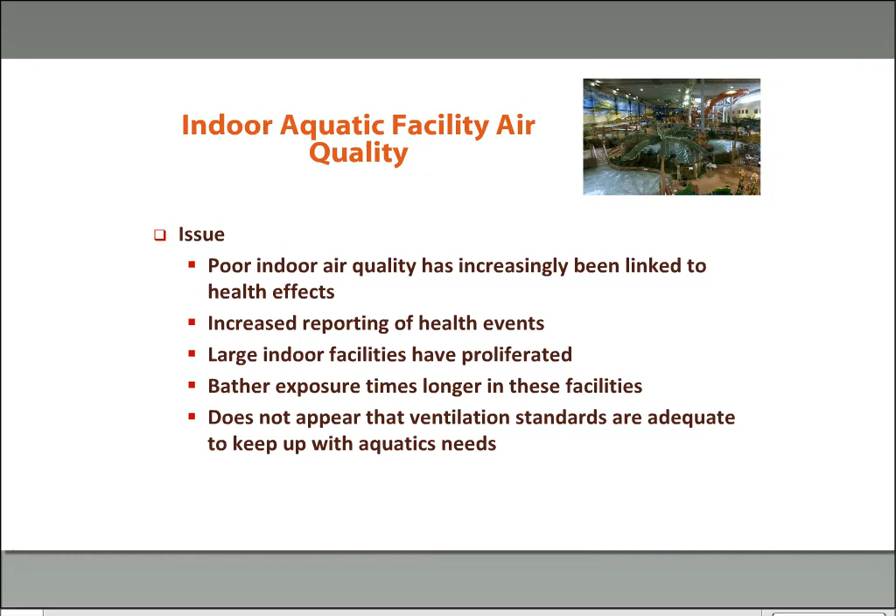The large indoor facilities have proliferated, and you're seeing more of the indoor water parks, and as such, the activity is a lot longer. The bather exposure time is longer. It's a destination. Folks will be there for hours at a time instead of going in for a quick swim and leaving. And from what we've been seeing, even as we started developing the initial criteria in the MAHC for ventilation, it does not appear that the ventilation standards are adequate to keep up with the aquatics need. So hence the ad hoc committee being established by the Council for the Model Aquatic Health Code.

And here's the roster for the committee. The chair is Ralph Kittler, and you can see that Chip Blatchley, Dr. Blatchley, is a member of the committee. We've got experts from a lot of the industry, from air handling to engineers to architects and operators, as part of this committee. And the basic charge for this committee was to identify and assess the factors that affect the air quality at indoor aquatic facilities, including the air handling, air distribution system design, effectiveness, and operation.

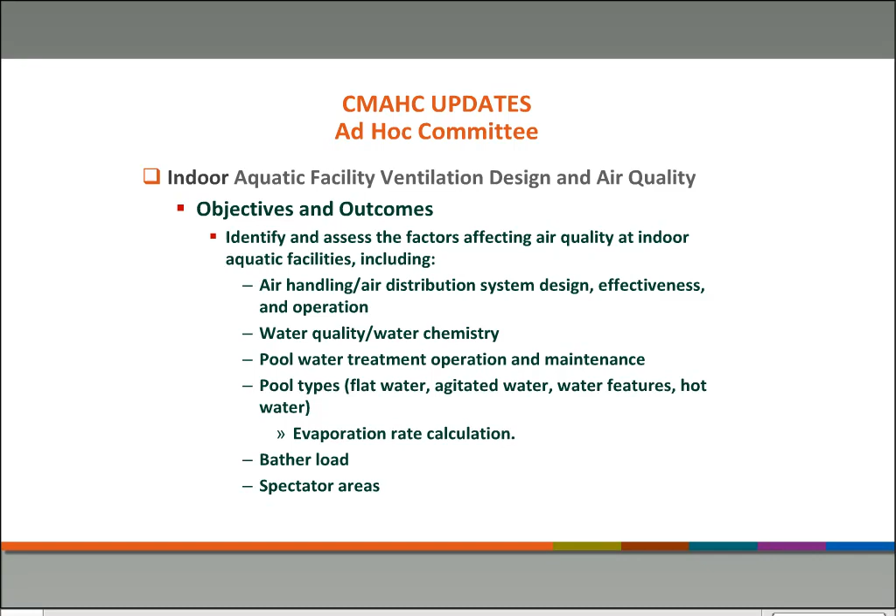It's not just the air handling that could be problematic. We know that water quality, water chemistry is kind of the root of the problem. So the committee is looking at that. Pool water treatment operation, maintenance, pool types. There's a big impact, whether it's flat water, agitated water, spray features, or hot water, and bather load and spectator areas. So the committee is looking at all those aspects to see what the impact is, and then to review and evaluate Model Aquatic Health Code requirements to determine if identified factors affecting air quality are adequately addressed. And subsequent to that, develop revisions of the MAHC design and operational standards to better address the air quality.

And as part of that work, the committee has identified a lot of different information that's going to be needed to answer some of these questions to move forward. So hence the research proposal that was requested by the ad hoc committee, which Dr. Blatchley put together and is going to speak to today, to try to answer some of these questions and bring data back so that we can move forward with appropriate design and operational updates to the MAHC.

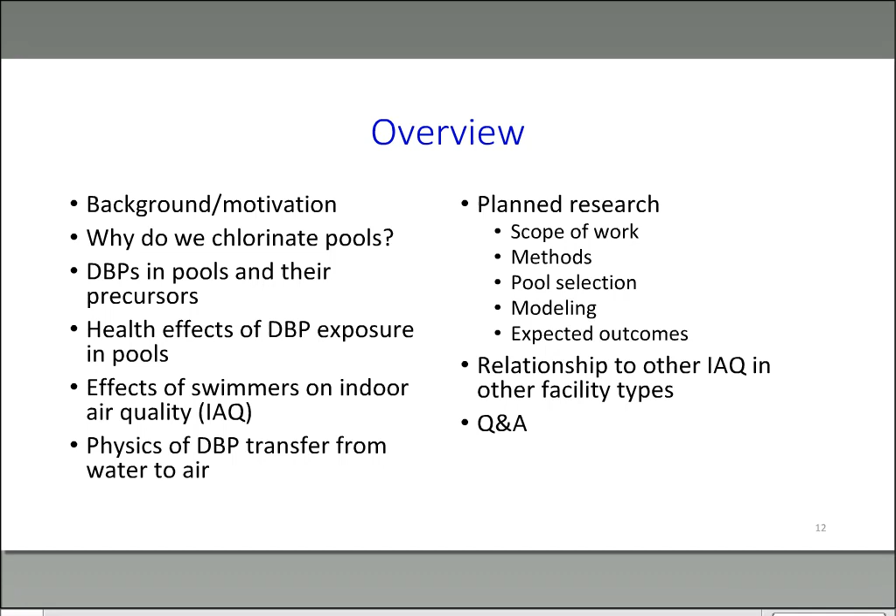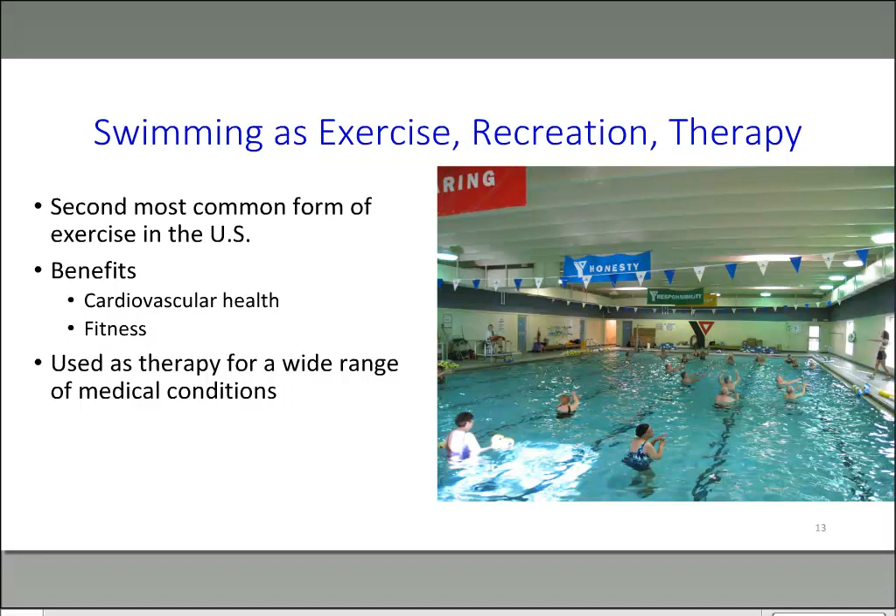Let me just dive in. So I think I'm probably preaching to the choir here. We know why it is that people choose to use pools for exercise, recreation, and therapy. Swimming is the second most common form of exercise in the United States and has a number of clear benefits in terms of improved cardiovascular health and fitness. It's also used as therapy for a wide range of medical conditions. So there's lots of different reasons why we have these facilities.

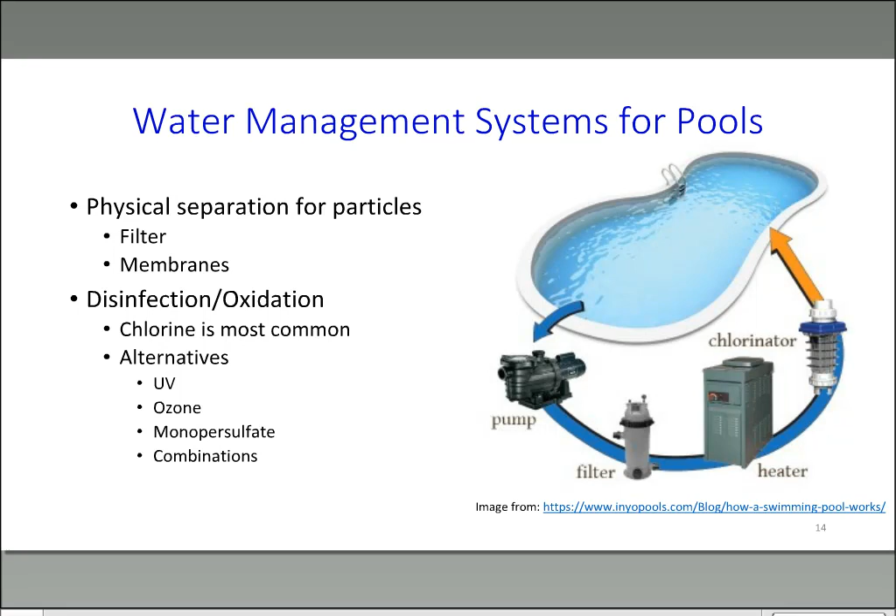Among pools, again, still preaching to the choir, there's a requirement in most applications for treatment of the water. That treatment is going to involve generally two groups of processes. The first are physical separation processes for removing particles. Those will involve a filter or membranes or both. And then the second group of processes I've just lumped together as disinfection and oxidation. Chlorine is by far the most common agent that's used to promote both disinfection and oxidation. But there certainly are alternatives that are relevant. They include, among other things, UV, ozone, and monopersulfate, and there are some combinations of these things that are added as well. So these things all will play roles in both water quality and air quality, but my focus today is going to be on the chlorine side of things.

So in terms of, why do we chlorinate pools? It's mostly to address those issues that I just described, and the reason that we've chosen chlorine for most of these applications is, number one, it's very effective as a disinfectant against bacteria and viruses. Chlorine is also a powerful oxidant, so that allows us to not only disinfect water, but also to degrade by oxidation constituents that are left behind in the water, usually by swimmers. Chlorine is also really inexpensive in a relative sense and pretty simple to use. There's a long history of its use, and so people are pretty comfortable with it.

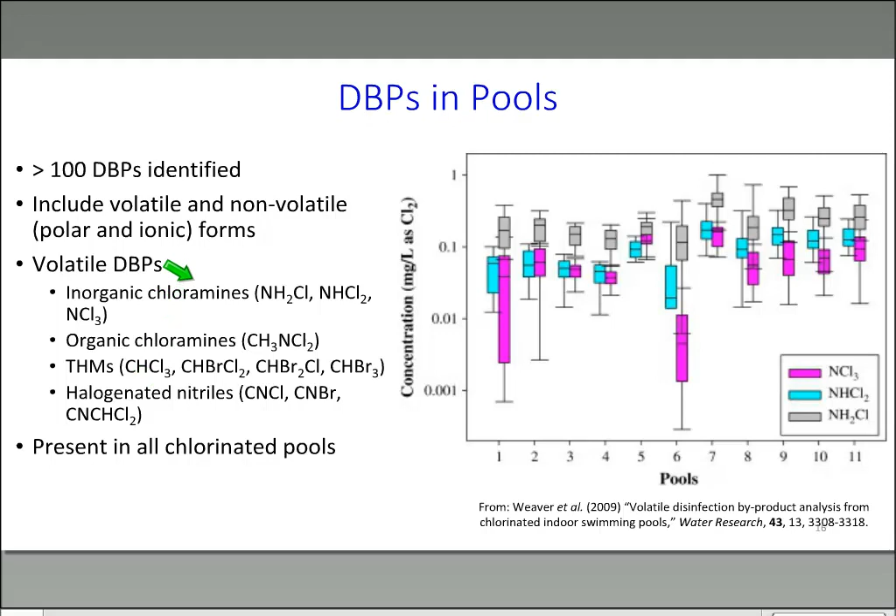And so what we observe is that within each of these pools, there's considerable variation in the concentrations of each of these things. And across the pools, there's also variation that shows up. But in a general sense, we find all of these compounds in pretty much every water sample that we collect from a chlorinated swimming pool. And they're all volatile, which means they all have the potential to end up in the gas phase.

All right, so then a question, where do these things come from? Most people consider the chloramines to come from chlorination of ammonia. And that is kind of the conventional way that they are formed, and that's really what informs most of our understanding of these chemicals. But in swimming pools, there's almost no ammonia that's present. So what that means is that these compounds really come from organic nitrogen compounds that contain reduced nitrogen.

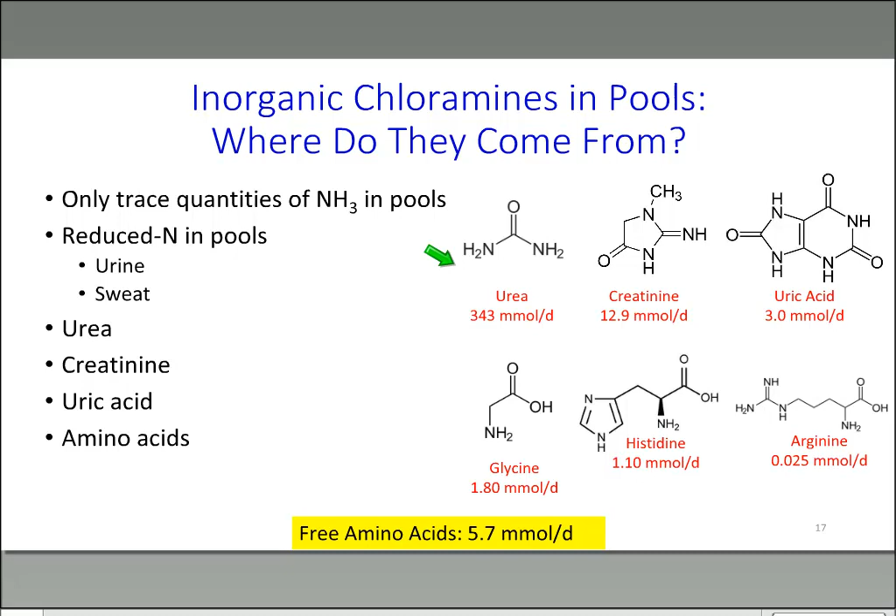And that organic nitrogen is introduced largely in the form of urine and sweat, and it includes these compounds that are listed over here: urea, creatinine, uric acid, and amino acids. So these are products of metabolism that show up in human urine. They also show up in human sweat, and because of that, they end up in swimming pools.

And just to put this in practical terms, that means that pretty much if you look at a pool and you count the number of people in it, you can multiply that number of people times roughly the volume of a shot glass, and that's how much urine they have contributed to the pool. And that's pretty much what you can expect. When people are in a pool, if they're exercising hard, they will also sweat. Competitive swimmers will release up to 1 liter per person per hour of sweat, and that's why hydration has become such an important part of the training regimen of competitive swimmers.

And then lastly, there is this group of chemicals that are called natural moisturizing factor that's important in the skin for retaining moisture. They include urea and amino acids and some other compounds, and these compounds are all very hydrophilic, which means they're very soluble in water. So that really explains why your skin becomes wrinkled after you've been in the water for a while. This natural moisturizing factor has been removed from your skin, and your skin will start to dry out, despite the fact that you just came from a swimming pool. But those chemicals, when they're released to a pool, also can participate in these reactions that I described before.

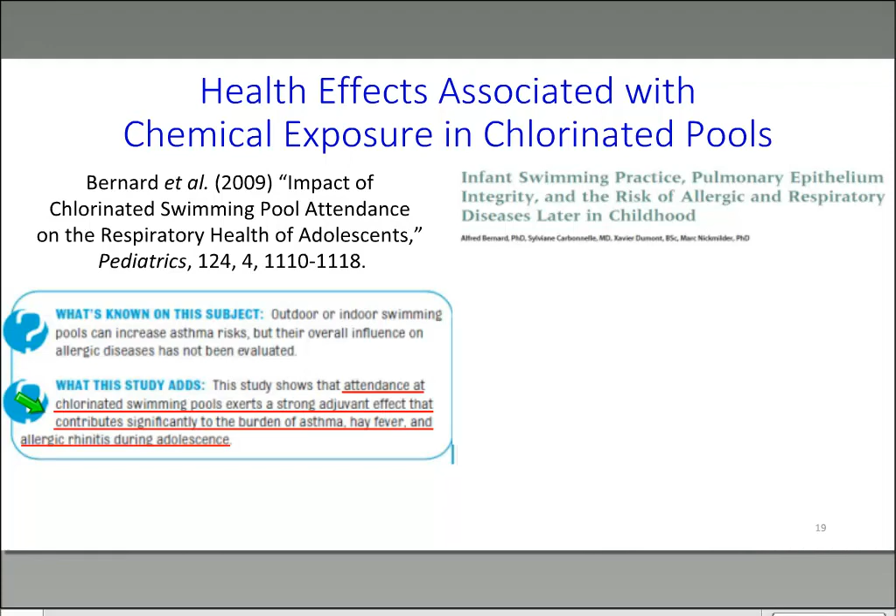So just to highlight this study, which was conducted by a group in Belgium that's headed up by Alfred Bernard, pointed out that attendance at chlorinated swimming pools exerts unpleasant effects on the respiratory system that may show up in terms of asthma or hay fever or allergic rhinitis during adolescence. A second study by the same group came up with a similar conclusion relating to infants that are exposed to chlorinated indoor swimming pools.

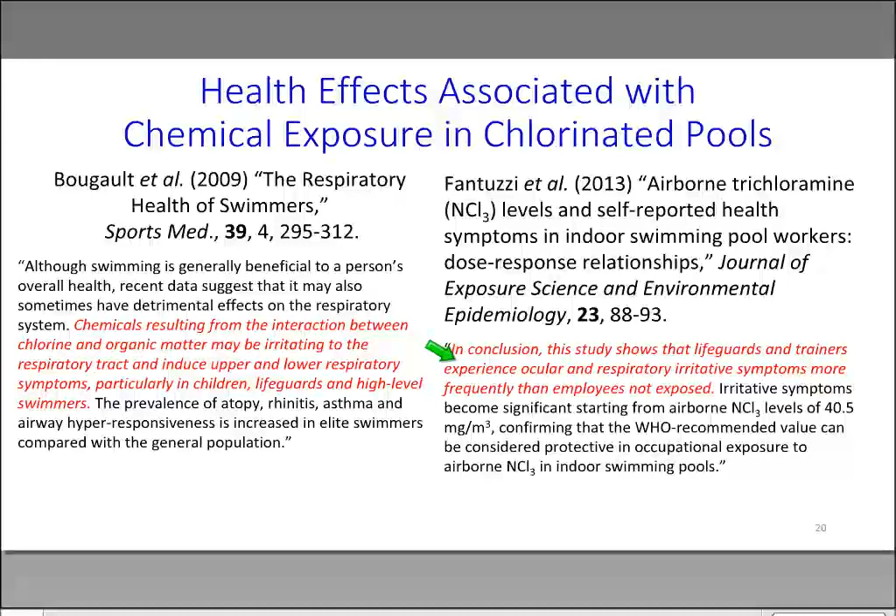Some other groups have published work to come up with more or less similar conclusions regarding not only swimmers, but also the employees at a swimming pool. So it's pretty much people who are exposed to the air environment in an indoor swimming pool that are exposed to these chemicals. They are subjected to stress on their respiratory system.

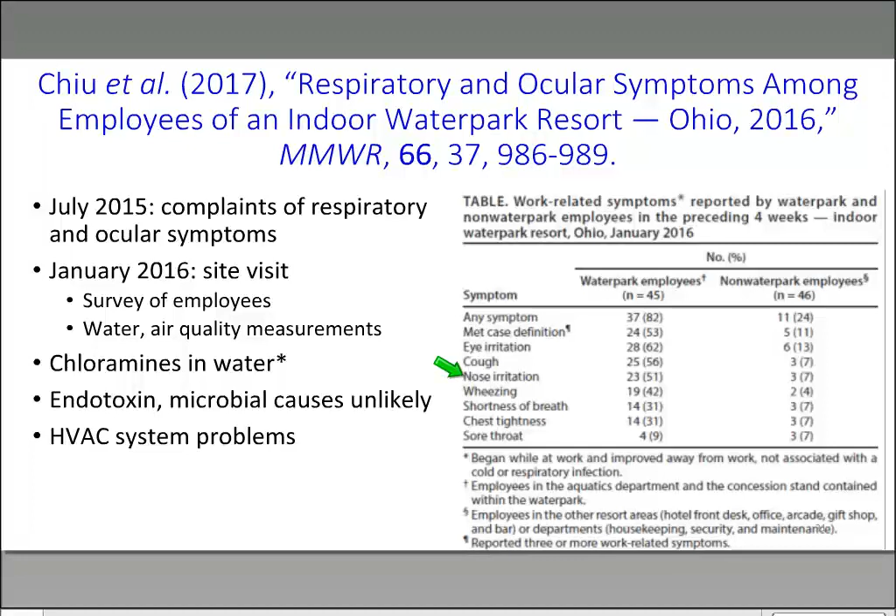So in a more general sense, we can sort of summarize the health effects that are associated with chemical exposure in chlorinated pools, especially indoor pools. And at the top of the list are respiratory problems, in other words, stress on the respiratory system. So there's more than 100 articles that have been published in the last 40 years or so that address this issue, and it's pretty clear that there is a link.

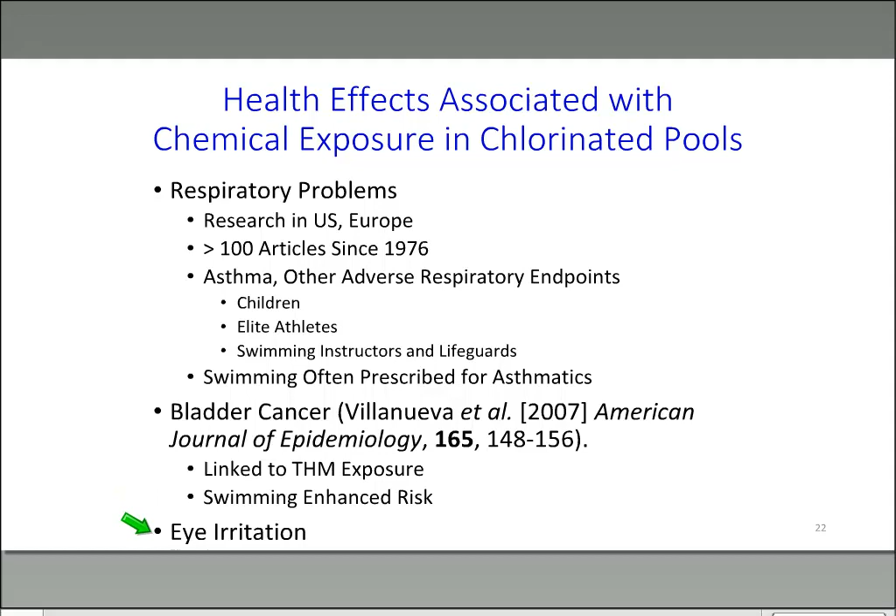There was a study that I'm aware of that was published a little more than a decade ago, the primary author was Cristina Villanueva from Spain, who demonstrated that there was a link between increased incidence of bladder cancer and time spent in a chlorinated swimming pool. And then lastly on this list anyway is eye irritation, which I think we're all familiar with if we've spent any time in a swimming pool at all without goggles on.

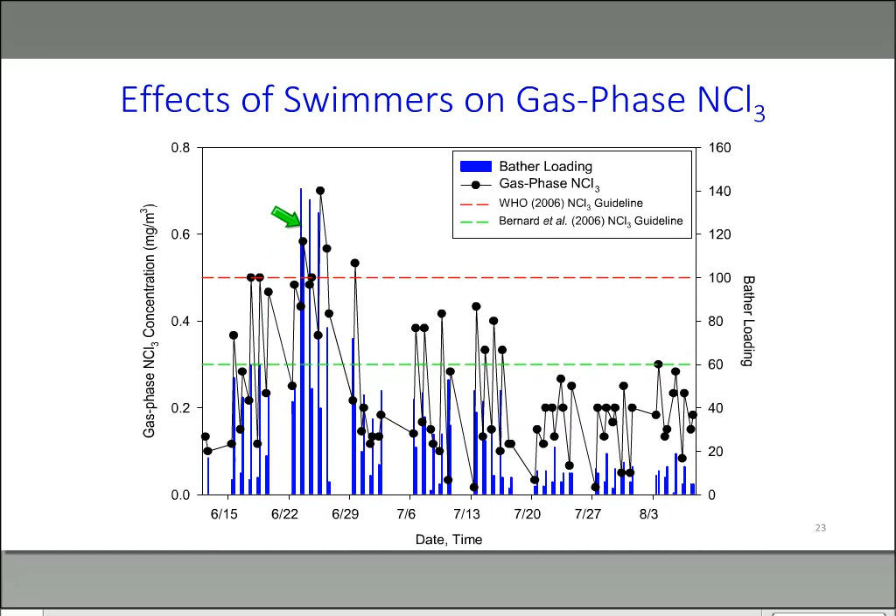So in looking at these data, there's a trend that shows up pretty clearly, and that is that the highest concentrations here are associated with periods where the pool was being used heavily. So the blue bars represent the bather loading in the pool, and we see that the periods of time when the pool was being used most heavily, again, are the periods of time where the trichloramine concentration was the highest.

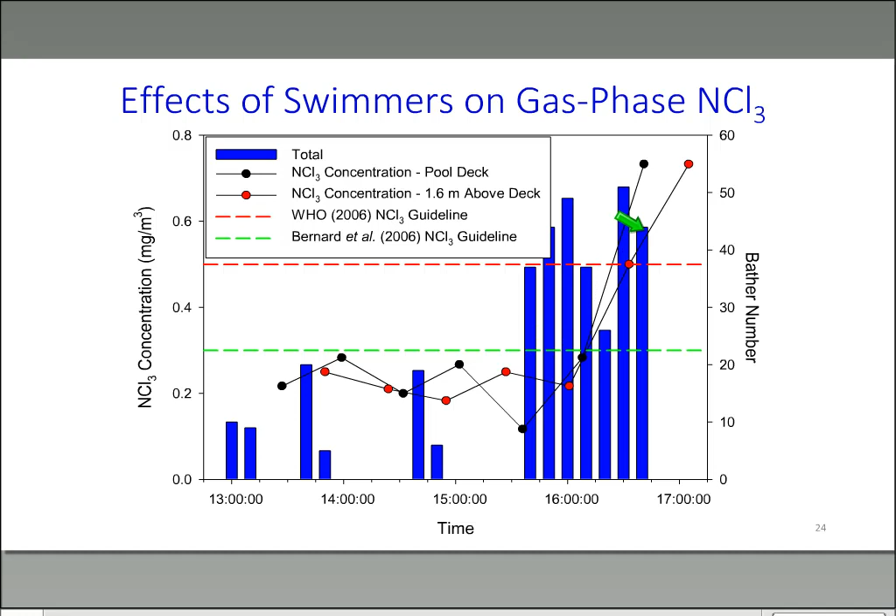So here's a second data set that illustrates more or less the same trend. Again, the concentration of trichloramine starts to go up pretty rapidly when the pool becomes crowded. And we've seen that in many pools. This is a much more dense data set that was part of a study that we just completed late last year, 2018. And there's 4 measures of indoor air quality that we measured with a device that I'm just going to describe as an IAQ monitor.

In other words, when we have a lot of swimmers in a pool, we can expect that volatile chemicals that are present in the water are going to be promoted. Their release is going to be promoted from the liquid phase to the gas phase. And so obviously that's going to have profound effects on air quality in these indoor swimming pool facilities.

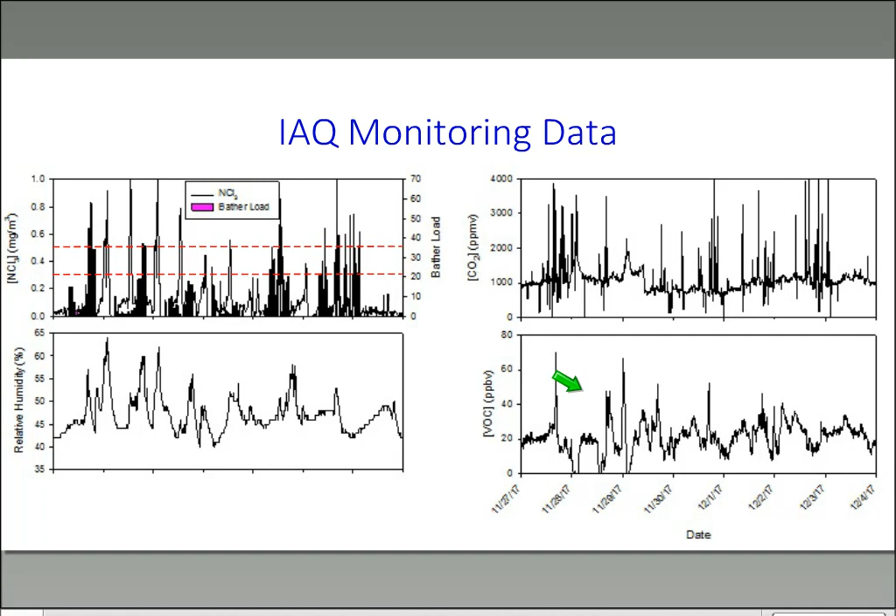All right, so I want to talk just for a minute about the physics that are responsible for transfer of chemicals from the liquid phase to the gas phase. And I'll use the so-called two-film model to illustrate this. The two-film model is probably the fundamental model that's used to describe transfer of chemicals from the gas to the liquid phase or in the opposite direction.

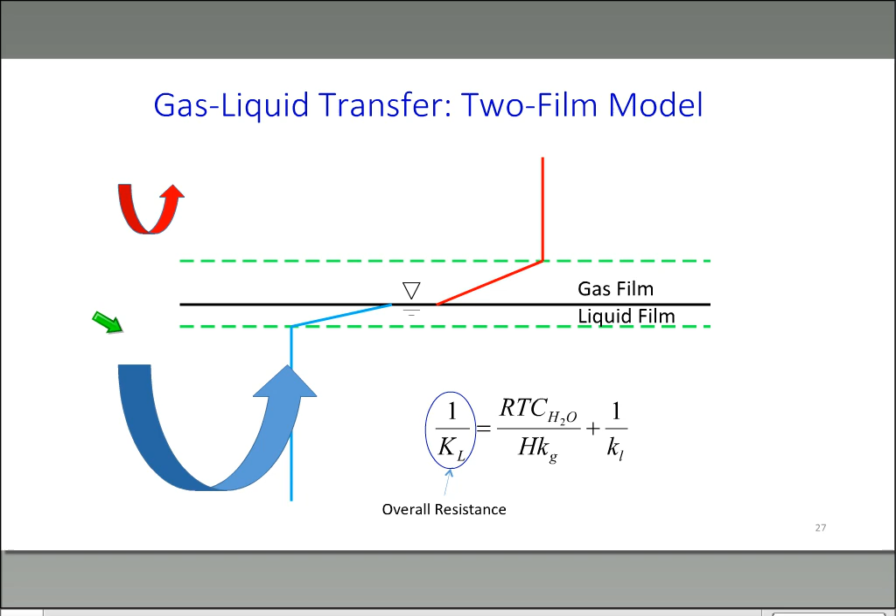And the chemicals that we're most interested in are chemicals that are dominated by liquid film resistance. So let me demonstrate that using a couple slides. So this is a collection of data that describe, first of all, typical concentrations of compounds that we see regularly in swimming pools. And then the next column represents the Henry's law constants for each of these compounds.

If you're not familiar with Henry's law, it basically describes how volatile a chemical is. So the larger the value of a Henry's law constant, the more volatile a chemical is. So you can see that trichloramine is pretty volatile. The next column represents what we would calculate to be present in the gas phase if the gas phase, in other words, the air above a pool, was allowed to come into equilibrium with the water that was in the pool. And then the last column represents concentrations that we actually measure.

So I'm going to zoom in on just trichloramine to point out that when we look at the actual concentration that we have measured in swimming pools, it's about 1% of the equilibrium condition.

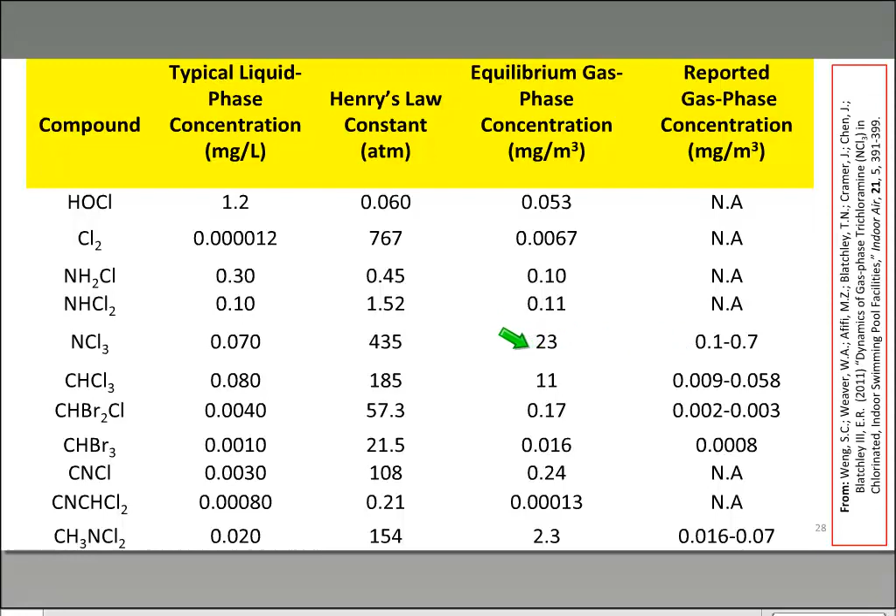And that's really important because if we ever got to an equilibrium condition in a swimming pool, everyone in that pool would be suffering. And it would be a really uncomfortable situation at the very least. And the reason that we never get close to these equilibrium values is that we operate HVAC systems that bring in clean air from the outside, rinse away most of these chemicals, and flush them to the outside. And we really depend on those systems. If they stop behaving, then we'll go from this condition and start approaching this condition, which is clearly undesirable.

Okay, so just to reiterate, some of the text on this vertical axis is not showing up on my screen, but it basically represents the fraction of resistance that's offered in each phase. And what's perhaps important is this blue line, and that represents a condition where the resistance in the liquid film and the gas film are equal. And so pretty much every chemical that lies to the right of that dashed green line is sufficiently volatile, in other words, has a large enough Henry's constant that its transfer is dominated by resistance in the liquid film.

So what that means is that if I promote conditions in a pool or if I establish conditions in a pool that allow for the transfer of that chemical, trichloramine, we can expect that those same conditions will allow for transfer of all these other chemicals to a similar degree. We'll still get transfer of these compounds, but they're a lot less volatile, and their ability to escape is also going to be much smaller.

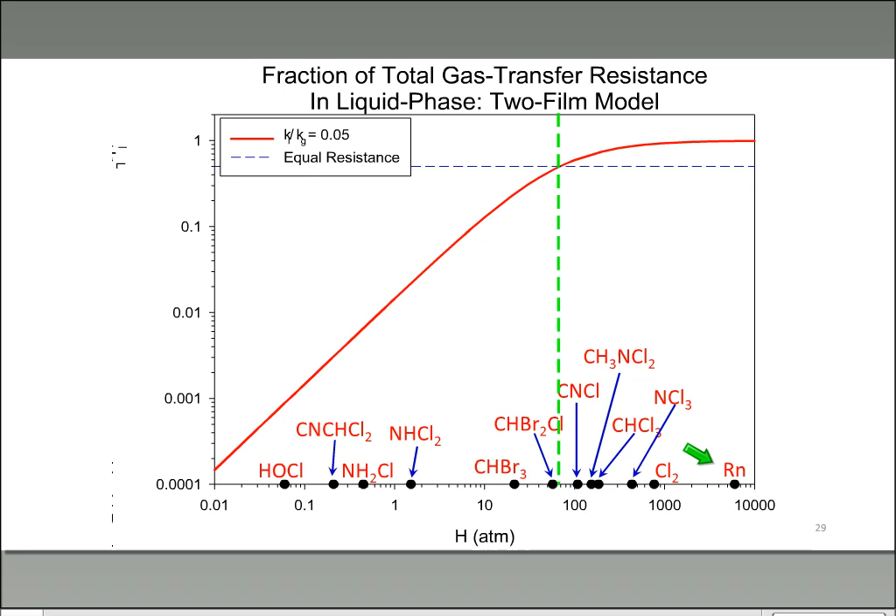Okay, now I've highlighted radon down here in the lower right, largely because I'm going to go on a bit of a tangent here in just a minute to talk about radon and how it might play a role in swimming pools, but at the very least, what we know about the behavior of radon in indoor environments, I should say, does teach us something about how we should treat indoor swimming pools.

All right, so in a general sense, I just want to summarize the factors that affect air quality in indoor swimming pools. Clearly, water chemistry is going to play a role. Mixing of the liquid phase is going to play a role, and we see that that shows up in the form of, for example, swimmers, but also spray features that exist at parks. Mixing in the gas phase, in terms of the operation of the HVAC system, is going to play a role. Water treatment, largely because it's going to affect water chemistry, will also play a role. And in a general sense, at least qualitatively, we understand that.

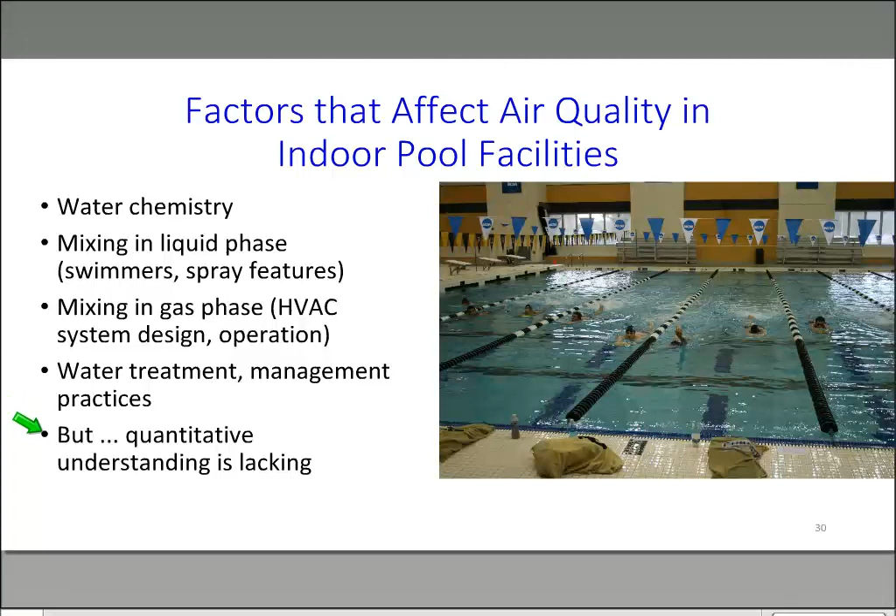But what is lacking is a quantitative understanding, and that really is what has motivated this study that we're about to start. So what I want to do is to talk about what it is that we're going to do in this study and what we're hoping to accomplish in this work. So first, what we want to do is to define the relationships among various design and operational parameters of swimming pools and indoor air quality.

In other words, how is a pool designed and operated, and what does that imply in terms of indoor air quality? We will focus on trichloramine as what I've identified here as a sentinel compound, but because of what we know about the physics and also measurements of the behavior of other volatile chemicals, there are other chemicals that might represent reasonable proxies for trichloramine, and we're interested in them not only because they might be a good proxy, but also some of them are a lot easier and less expensive to measure than trichloramine.

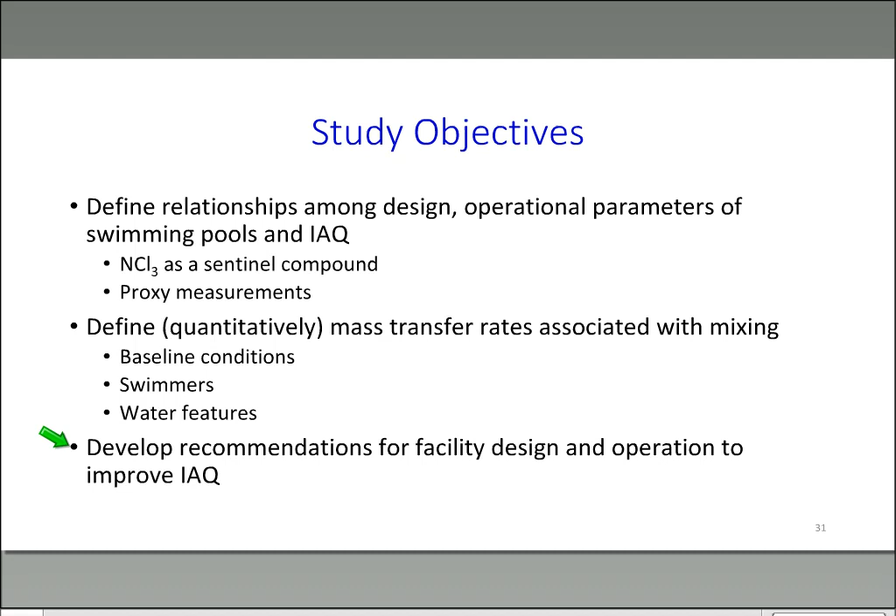Secondly, we want to be able to quantitatively define mass transfer of these volatile compounds and how that associates with various mixing regimes that exist in pools. So those regimes include baseline conditions when the pool is not being operated or is not being used by swimmers. Second of all, transfer that's associated with swimmers. And lastly, transfer that's associated with various water features. And lastly, then, we want to use that quantitative information to develop recommendations for facility design and operation so as to improve indoor air quality.

All right, so let me just describe the project itself. The project will take place in two phases. Phase one, we hope to start within the next week and a half. This is going to be conducted as a collaboration with some colleagues of ours at Michigan State University from the College of Medicine.

My group at Purdue is going to be conducting measurements of water chemistry, air chemistry, and also characterizing the pool in terms of how they treat their water, how their HVAC system has been designed and operated, and what is the bather load. The group from Michigan State is going to be conducting some physiological measurements in parallel, simultaneously with the measurements that we conduct on the pools themselves.

So this first phase of the study is going to be conducted at competition pools and we're going to focus on those pools over the next 6 months when they're scheduled to have relatively large swimming competitions, meaning that the bather load in these pools will be relatively high. So we'll go into these pools before the competition starts and continue our monitoring through the competition so that we can characterize the effects of the heavy bather load, which we expect to be the worst conditions that these systems are likely to experience.

Phase 2 will then continue with a particular focus on the chemistry side of things. We'll also continue to characterize the pools as we did in Phase 1, but in Phase 2 we're going to expand the range of pool types to include things like therapy pools and splash parks. So we're not going to focus exclusively on competition pools, and we're going to be looking at a broader geographic distribution than the distribution that will show up for Phase 1.

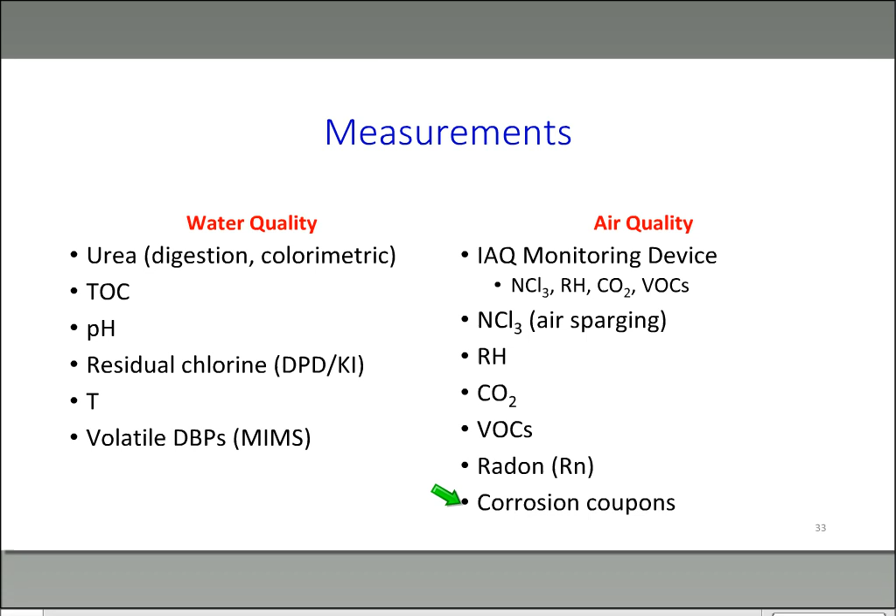On the air side of things, we're going to be measuring indoor air quality with this IAQ monitoring device. It allows us to measure in real time, simultaneously, all 4 of these parameters: trichloramine, relative humidity, carbon dioxide, and VOCs. In parallel with that, we'll do some selected measurements with a wet chemistry method for measuring trichloramine, and we'll also measure other characteristics like relative humidity, CO2 and VOCs using other relatively inexpensive off-the-shelf instruments. For reasons that I'll describe in a minute, we may have an opportunity to measure radon as well, and then lastly, we're going to use corrosion coupons to measure corrosion responses during this same period.

All right, so just briefly, I want to describe this wet chemistry method that we use for measuring trichloramine in air. We're going to use an air pump to draw air into a series of gas washing bottles, 2 in series. And in those gas washing bottles, we're going to put an aqueous solution of DPD and potassium iodide. The idea is that combination of DPD and potassium iodide will react very aggressively with trichloramine that's in the air, and it'll trap it in this solution. And then the solution will turn pink in response to that. So then we can measure how much pink has shown up, and we can translate that into a trichloramine measurement.

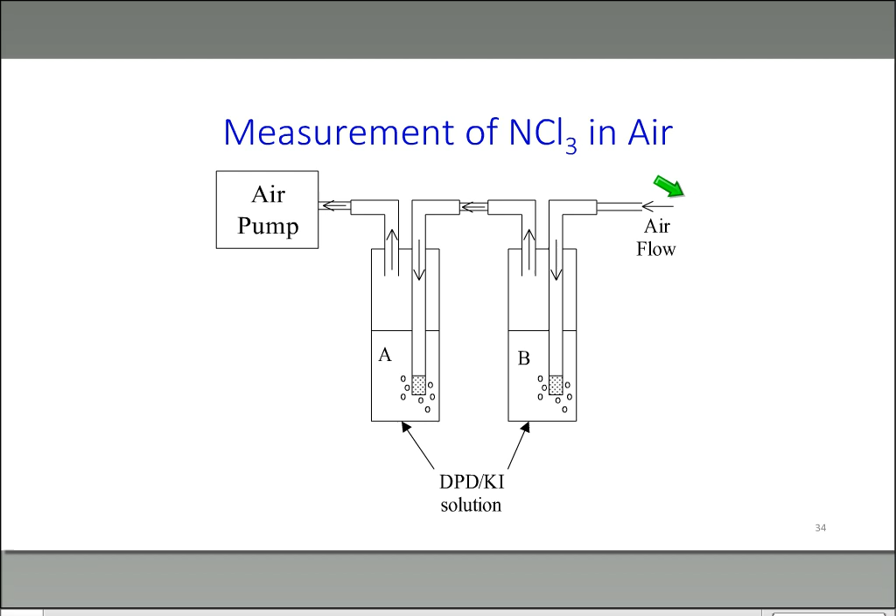So here's an image of that assay that's being used, and you can see this kind of faint pink color that's showing up in the first of these 2 tubes. Air is going in here, and it goes out, goes in here, and it goes out through this pump, and then out. Okay, and that's a method that we've used in the past to measure trichloramine.

So what we've found is that we can use this method to measure volatile disinfection byproducts in water. And what happens is after they go through this membrane, they get on the other side of the membrane, and then they're in the gas phase, and they're swept in the opposite direction by an inert gas into a mass spectrometer where they can be measured and identified.

So this method is very powerful. It's also really simple and quick to conduct, and we have one of these instruments in my lab. So the pool characterization will include a number of things like, for example, bather load that we can quantify just with a digital camera, the characteristics of the air handling system, the characteristics of the water management system, and general maintenance practices that are used at each of these pools where we're going to be collecting data.

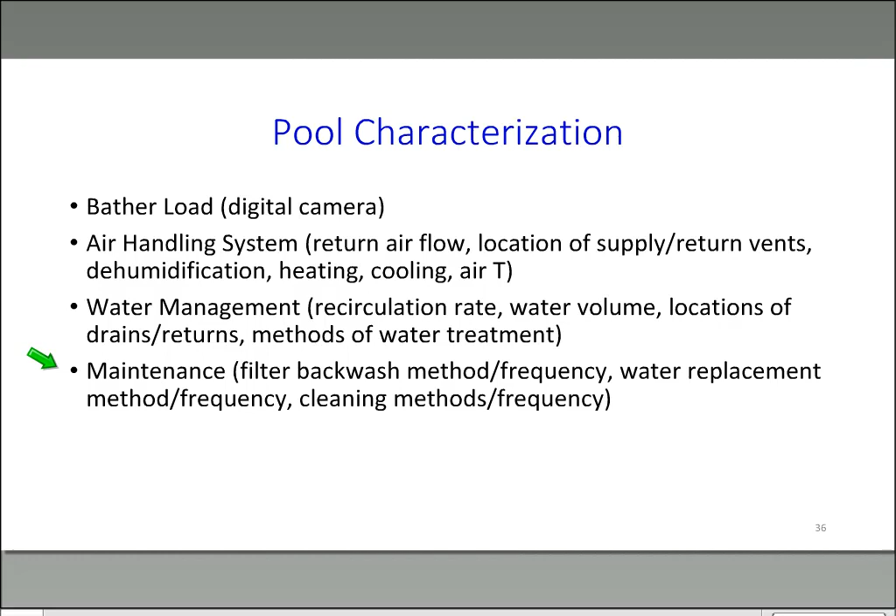Okay, so I mentioned a minute ago that I want to go on a bit of a tangent, and this is just sort of a coincidental situation that has shown up. So last week I was contacted by Jessica Maloney from the Wisconsin Department of Health Services in Madison, Wisconsin, and she described for me a situation that she had encountered where in some of the fish hatcheries that exist in Wisconsin, which are indoor facilities for obvious reasons, the radon concentration in those facilities can be quite high.

So she also sent some images that she allowed me to use in this presentation to describe why that is. So these PVC columns that show up here along the wall, these are being used to oxygenate the water that's being brought into this system. So this particular hatchery uses groundwater, and that groundwater is relatively low in dissolved oxygen. So they want their fish to be happy, so they're going to transfer oxygen into that water before they send that water into these tanks.

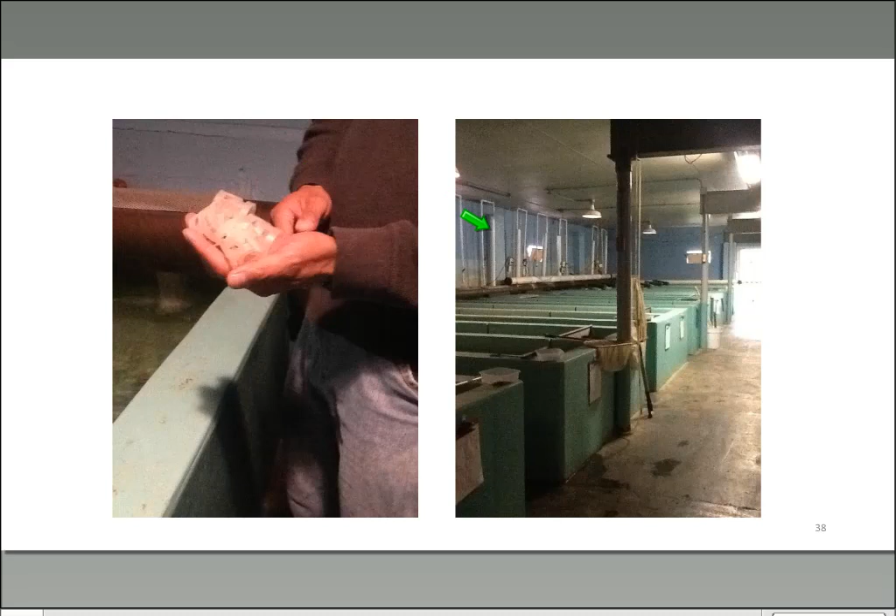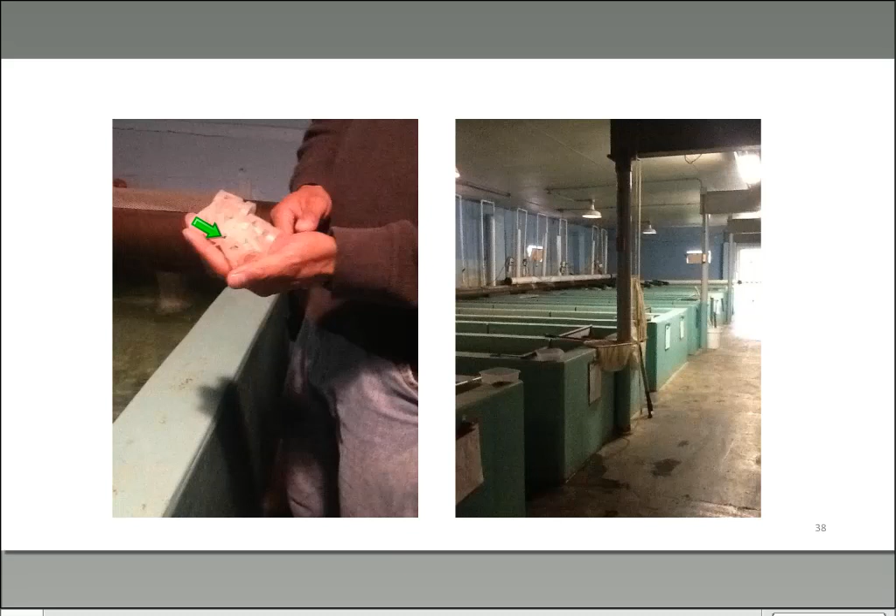One of the problems with using these basically aeration columns is that they allow for transfer of oxygen into the water. They also allow for transfer of volatile chemicals like radon out of the water. So what's happening is they're pumping about 2 million gallons of water per day into this facility, and they're stripping the radon right out of here, and it ends up in their indoor air. And that's caused a problem for them. So their stripping towers, that's these things right here, are packed like most stripping towers are with this kind of plastic packing to promote transfer. So again, that's very effective in promoting transfer of oxygen. Unfortunately, it's also promoting transfer of radon.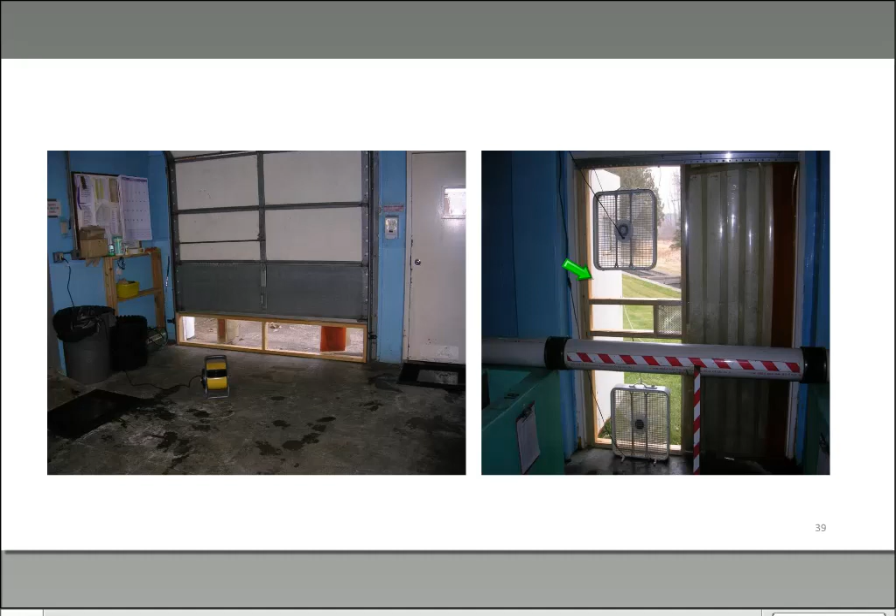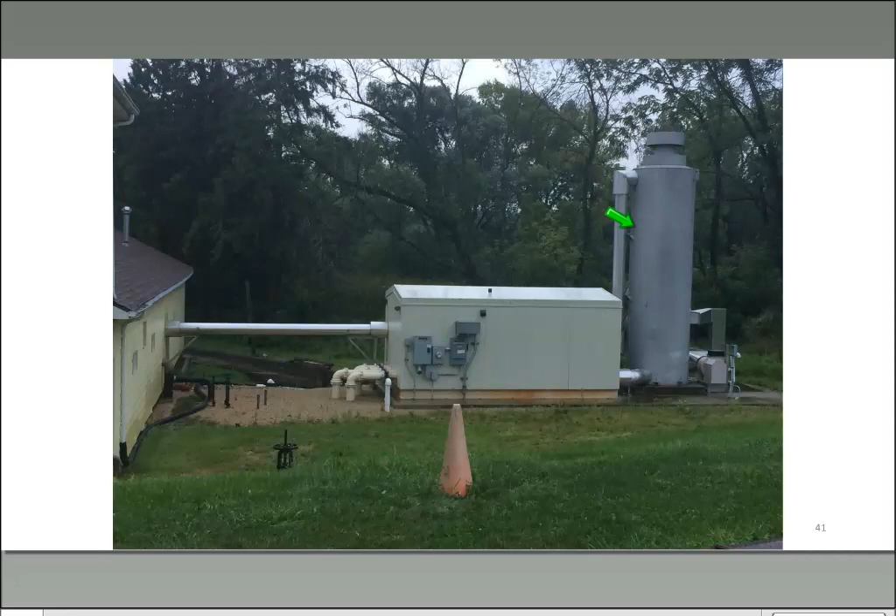I don't know if radon is going to be a problem in indoor swimming pools because they don't use anywhere near as much water as a fish hatchery will. But on the other hand, there are no data that I'm aware of that describe radon concentration in indoor swimming pools. And so thankfully, Jessica has volunteered to allow us to use one of their radon meters for purposes of measuring radon concentration, and we plan to implement that as part of this study that we're about to start.

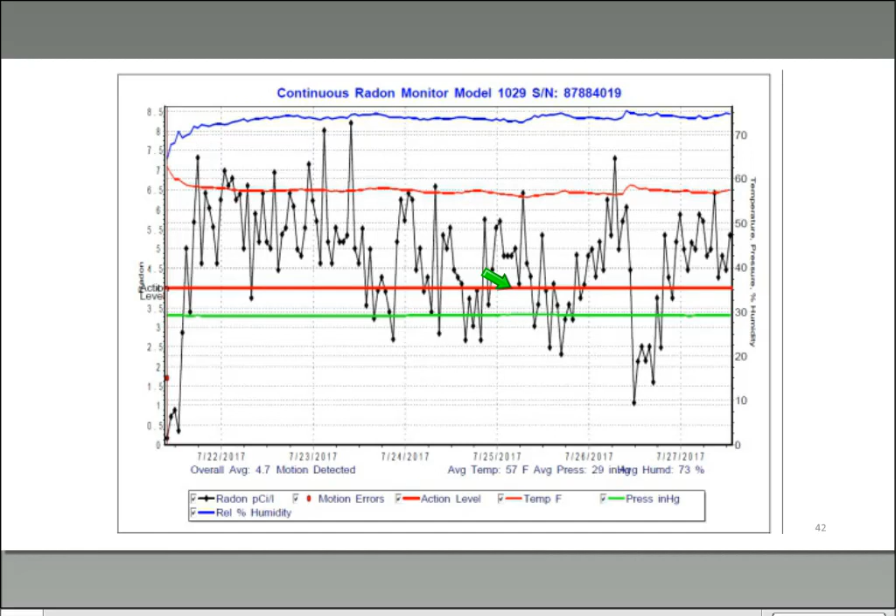Okay, so just to sort of wrap up, where we're going with this work is that we want to collect these data about mass emission rates of these various compounds and also indoor air quality. And we want to incorporate that into a model to describe the behavior of this system. So the model itself will include terms to account for mass emission that's attributable to just ambient circulation, swimmers and the various water features that exist at this system, and the other characteristics of the system.

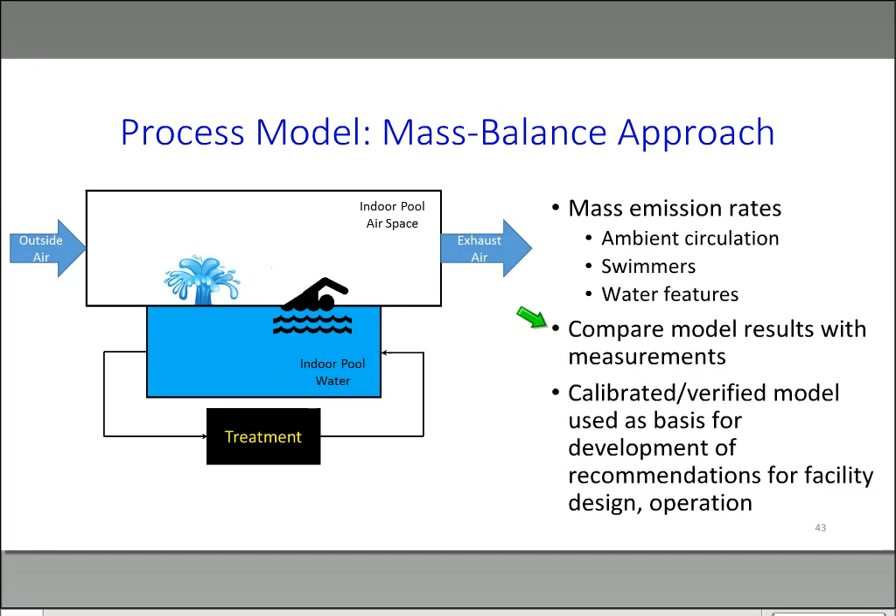And what we want to do is to see how does this model and its predictions compare with the actual measurements that we have from these facilities where we're going to be collecting this information. If we are then able to successfully demonstrate that the model has been both calibrated and verified using these data, then the plan is to use the model to ask some what-if questions and to inform what we would suggest about how these facilities should be operated in the future and designed.

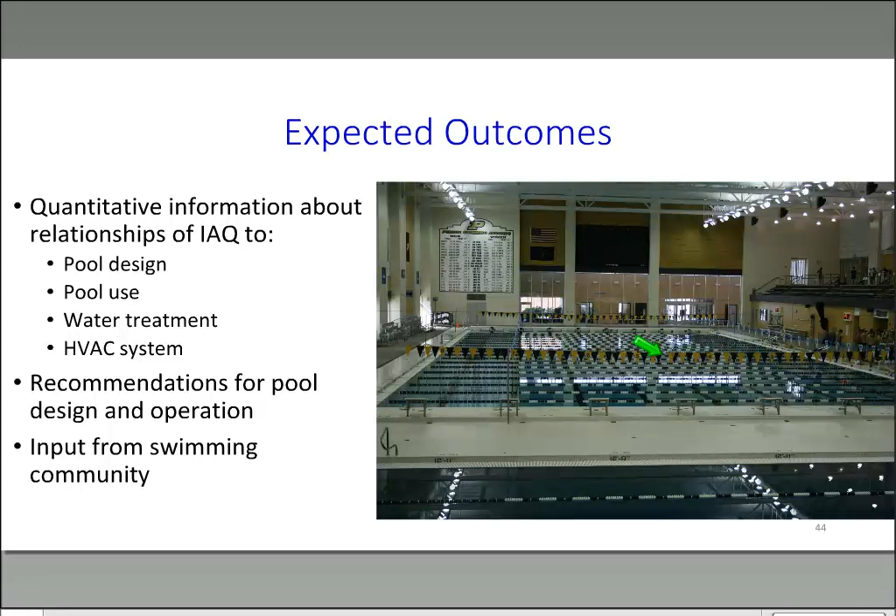So what I expect to come from this is, first of all, quantitative information about the relationships of indoor air quality to things like pool design, pool use, water treatment, and the design and operation of the HVAC system. In turn, we will then use this to provide recommendations for how pools should be designed and operated. And along the way, we want input from the swimming community because they're the people who are going to be most affected by this research.

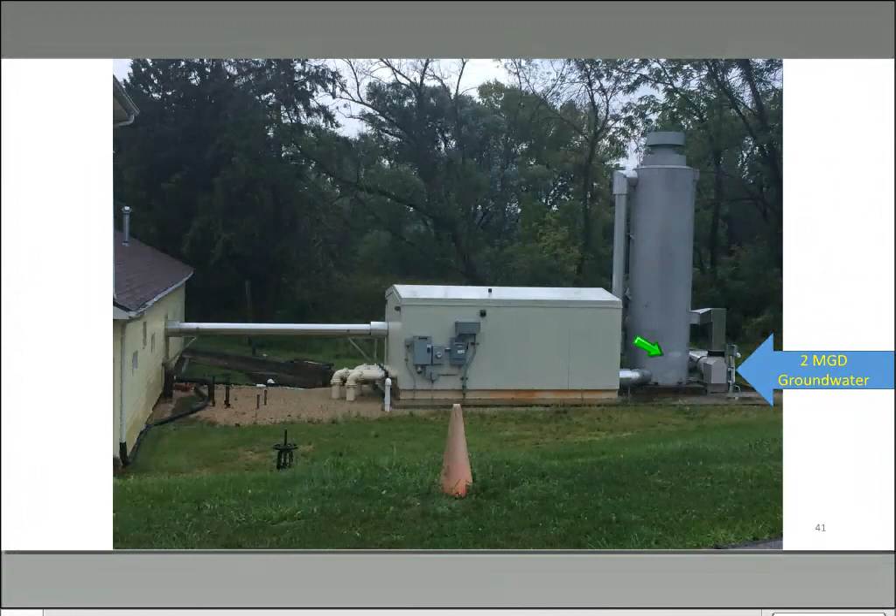We have a question about if the first pool you mentioned had a medium pressure UV. Boy, I'm not sure which pool you're referring to, but honestly, that one clearly doesn't, and I'm not sure if any of these pools had medium pressure UV in them. Okay. Perhaps there would be a follow-up question to try to address that. So medium pressure UV is very commonly used in pools, probably more commonly than low pressure UV. And some other work that I didn't present here that we've conducted in the past suggests that it might be favorable to low pressure UV in a sort of holistic sense.

UV is used for 2 reasons in swimming pools, at least that I'm aware of. One is for inactivation of cryptosporidium. It is the best disinfectant for inactivation of crypto. And second, UV is effective for breaking down chloramines. So anyway, if there's another question about medium pressure UV, I'd be happy to try to answer it. Okay. They didn't go into any more detail, but we can absolutely follow up offline.

Okay. So the next question was, how long of an exposure and or how frequent is related to an increased risk of the health effects? Yeah, so in a general sense, health effects are associated with time and concentration. More or less the same way that we think about disinfection. It is essentially the same thing.

I can't answer that question in a quantitative sense other than, the longer you're exposed, the worse off you're going to be. The higher the concentration, the worse off you're going to be. But that's really, to a large degree, why we have brought in these collaborators from the College of Medicine at Michigan State University. So these are people who focus on that issue specifically, and they have the expertise to address it.